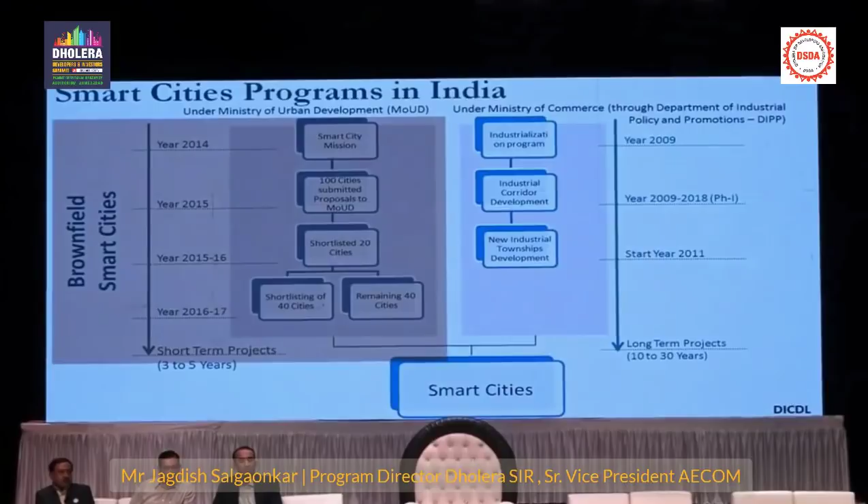So we call the one on the left a brownfield smart city program. Brownfield meaning that the cities are existing and you are trying to convert them into smart cities. So they install certain technology or Wi-Fi or traffic management to make it smart, like Surat is an example. Ahmedabad may be an example. However, on the right is the greenfield smart city. So greenfield means there is nothing there now. Greenfield means it's all grass, cover, everything is green.

From there we are building a city, and that program is called a greenfield city program, and Dholera is under the greenfield city program, under the Delhi-Mumbai Industrial Corridor, which is part of India's Industrial Corridor program. Now, I don't know how many of you know, but there are 5 different corridors that are planned in India. And the main purpose for creating these corridors is to increase the manufacturing GDP of India.

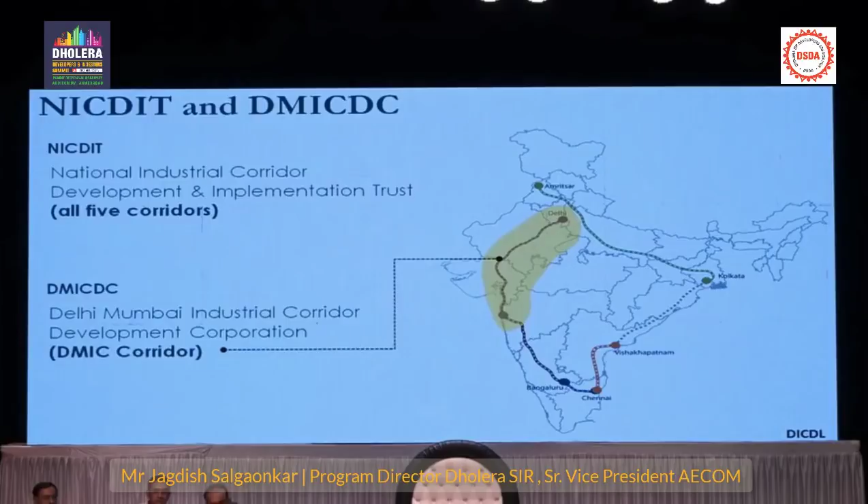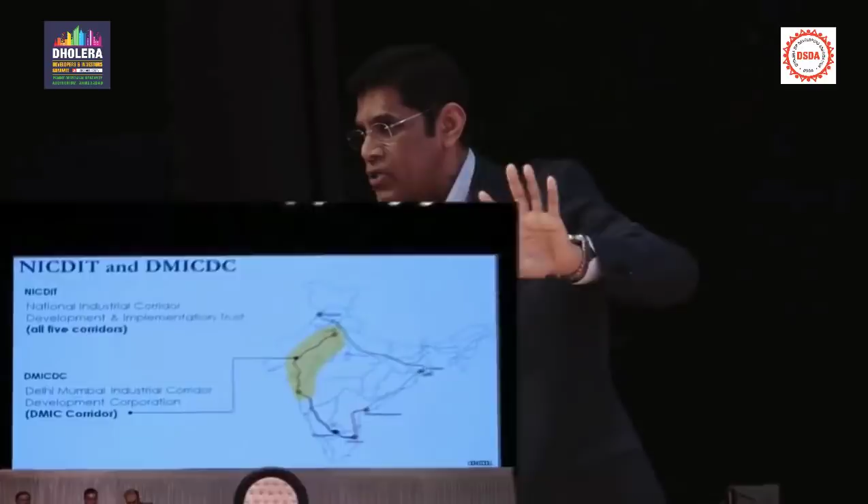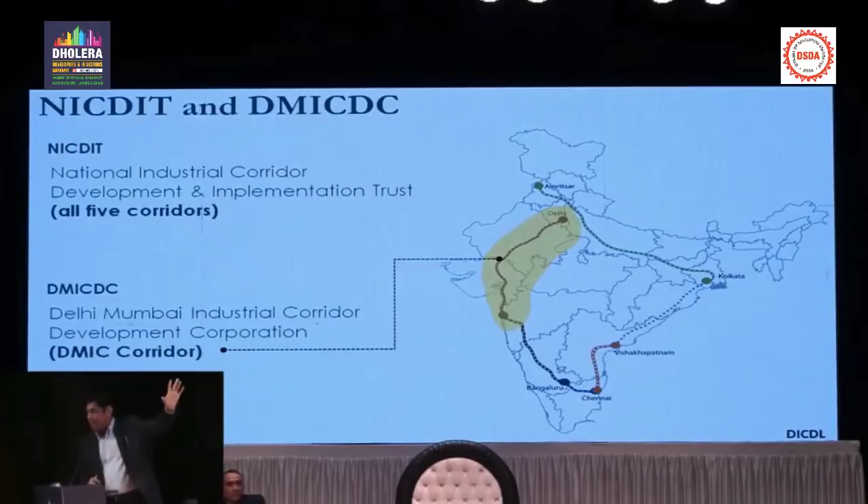So now you know the difference between where Dholera is as a greenfield smart city and where the other smart city programs are. They have no connection, the funding mechanism is different, and the management is completely different. But they are routinely mixed up. One is called the other, and people call me smart city Dholera, and they think I'm a part of the brownfield smart city.

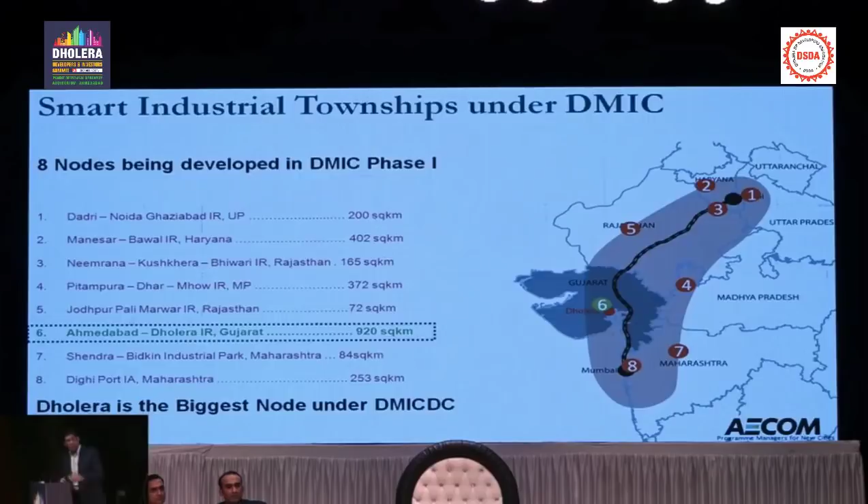So on this Delhi-Mumbai industrial corridor, there are 8 different nodes, as they call it, industrial areas that are planned. And you can see number 6 is Dholera. And this is the largest node on this Delhi-Mumbai industrial corridor. So Dholera is the largest. It is also the node that has come farthest along in terms of construction. So how big is Dholera?

Dholera is 920 square kilometers, but if you compare that to some countries like Singapore, it is even bigger than Singapore. So we are almost building a country like Singapore, because you can see Singapore is 71,900 hectares and Dholera is 91,000 hectares. So it's almost 20% bigger than the country of Singapore. So now you can imagine why it takes time, and I will explain that to you also.

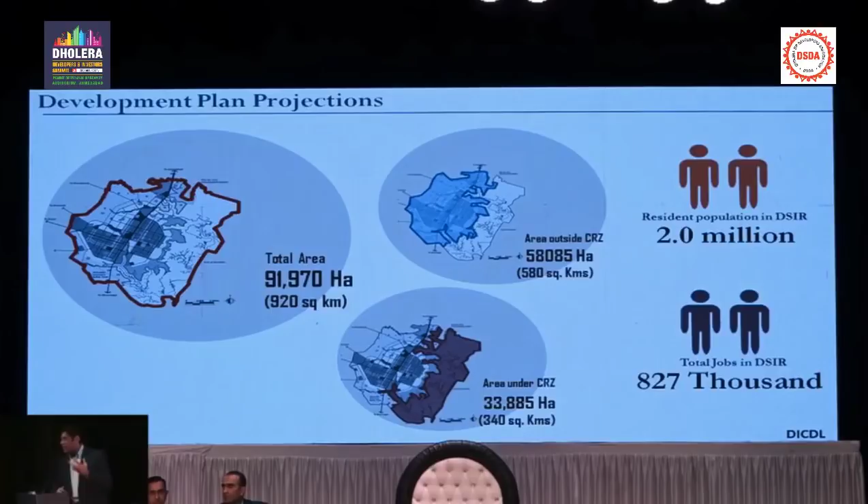These are all new industries under the Make in India program, which is what's going to create the economy for India.

So, one question: I've been working on this project since 2013, and a very common question that comes to me is, why does it take so long to build a city? So I wanted to show you the timeline as to why it takes so long. So in 2009, we enacted the SIR Act. But once the SIR Act is enacted, several things have to happen before you start building a city.

So you have to create a development plan, which takes some time. The development plan has to be then approved. To get a sanctioned development plan, it takes anywhere from 3 to 5 years. Because a development plan is a formal, official document of the government of Gujarat. It has a public review process, it has a public comment timeline, and it takes that long. You cannot rush. It is like saying, deliver me a baby in 3 months. The baby will take 9 months, give or take 15 days, 1 month maybe. So development plan will always take 3 to 5 years because it is a time-consuming process.

After the development plan, we have to do the design. After the design, then we have to do the construction. So you can see, by the time we go through the entire process, we are anywhere between 7 to 11 years.

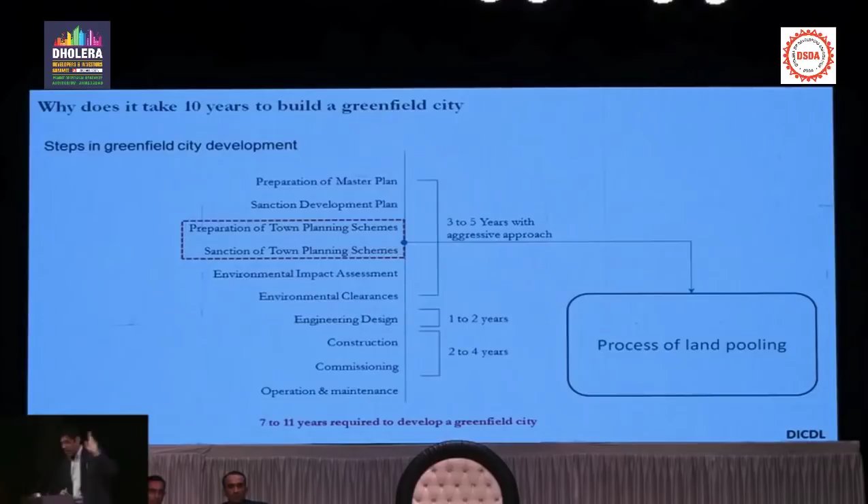So I want you all to know that the state of Gujarat, the Gujarat bureaucracy, and the engineers are all doing a fantastic job. So don't worry, this will happen. And I will show you how this will happen. So how do we start constructing a big country like Singapore or a big city like Dholera? You cannot do all 920 square kilometers.

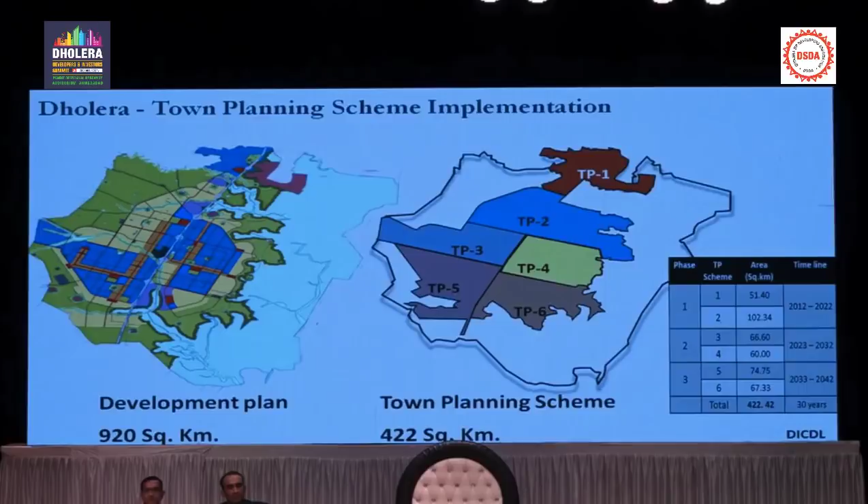So as you know, we have town planning schemes. So we broke the town planning schemes into 3 phases. Phase 1 is TP 1 and 2. Phase 2 is 3 and 4. And then TP 5 and 6 is phase 3. And you can see on the right-hand side, we have given you the approximate timelines. So phase 1 is up to 2022. We are doing the construction. Uske baad phase 2 or phase 3 chalu hoga, right? But within phase 1, if you look at phase 1, it is 153 square kilometers, which is TP1 and TP2.

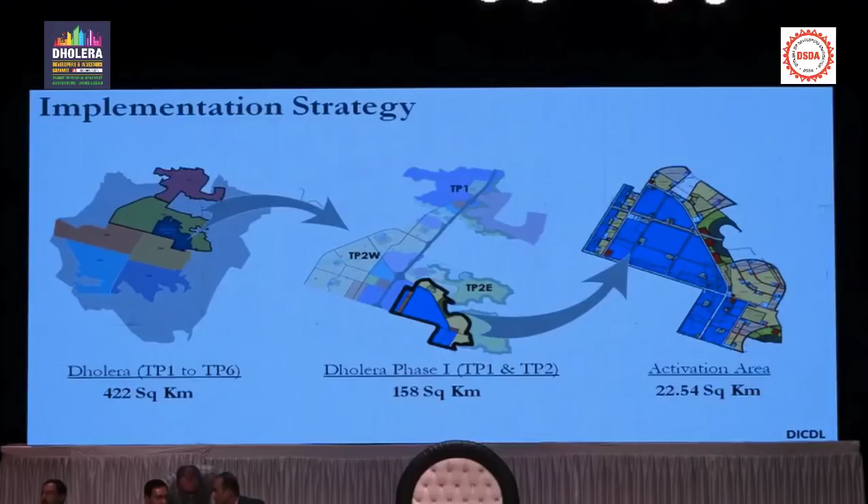So you can see new cities take time, and 22 is not a bad size. It is a big size, but because of industrial production, it is going to go very fast once companies start relocating. So in this 22 square kilometer, this is the breakdown. In 5 years, we will have 76,000 jobs in Dholera, in the activation area. Population will be about 1 lakh.

And this purple area that you see, that purple area is completely industrial. Okay? So majority of activation area is completely industrial.

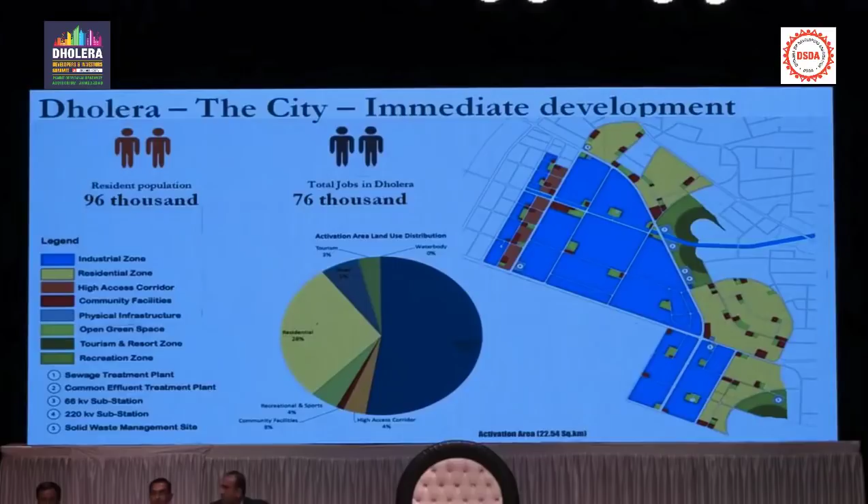And all the yellow is residential, the green is green cover, and all the red dots are public amenities, parks, playground, water, sewer, those kinds of things, power plant. So this is our footprint of 22 square kilometer. And this footprint, Dholera, is going to be managed by DICDL.

DICDL is a special purpose investment vehicle, SPV I should say, which is formed between DMICDC and the state government of Gujarat. And this is a special partnership, which is a 51-49% partnership, in which DMIC has put in 3,000 crore cash.

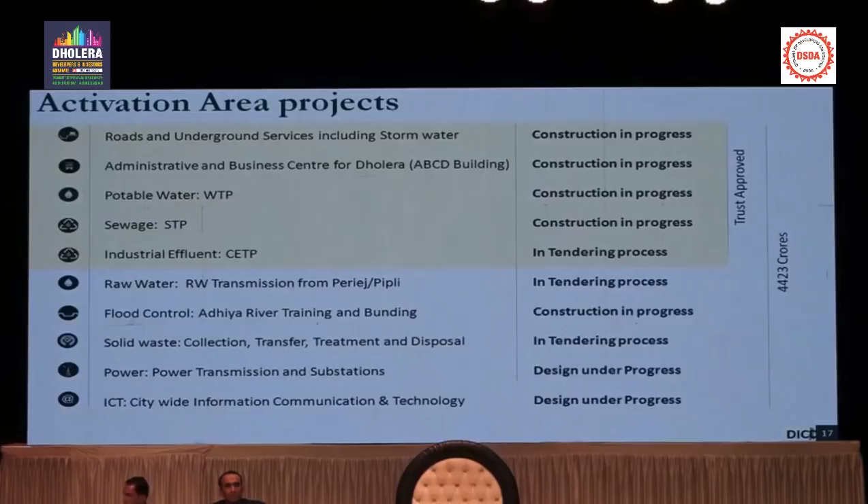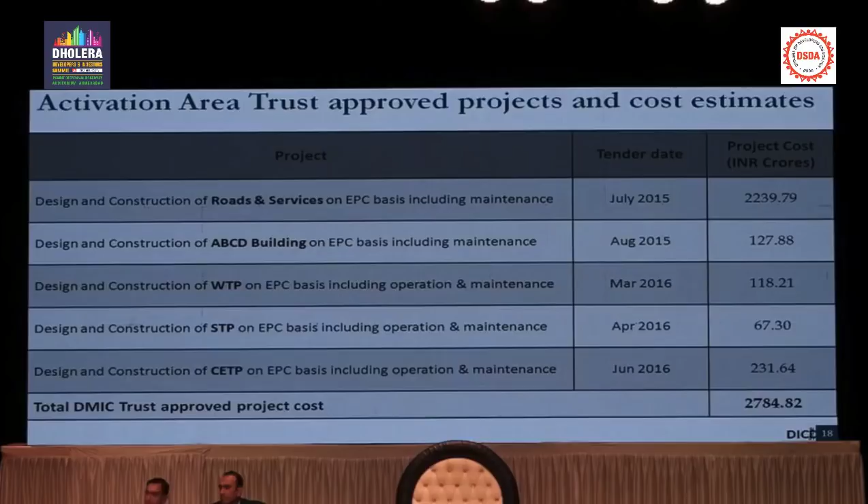We have 5 construction contracts already let out. L&T is the largest construction contract. You saw them on the film earlier today. Cube Construction, CCEL is doing the ABCD building. L&T is also doing the sewer and the CETP. And then SPML Construction from Delhi is doing the water treatment plant. So we have country's largest 5 contracts being let out at this amount.

Okay, so now I want to get a little bit into connectivity, because the second most frequently asked question to me is, hey, where is your Dholera located, 100 kilometers away, how will people go there, who will go to settle there?

So I want to remind everyone that there are many places in the world where you start a new city that's 50, 60, 80, 100 kilometers away, but very soon, over 10, 20 years, it sort of merges into the nearest main city.

In our case, we are hoping that Ahmedabad will be the nearest main city because it's a more vibrant, bigger community. We are also introducing this concept of a twin city, where Dholera and Ahmedabad will become almost like a twin city concept. Maybe not now, but maybe in a few years, because the corridor between Ahmedabad and Dholera is right now building a 6-lane access controlled expressway.

That expressway is actually under design by the National Highways Authority of India. It has already been funded. Land acquisition has started.

We are also building a metro inside the expressway that will reduce the commuting time between Ahmedabad and Dholera to less than 45 minutes. Now, when that happens, distance will no longer be an issue. It is going to become a twin city concept.

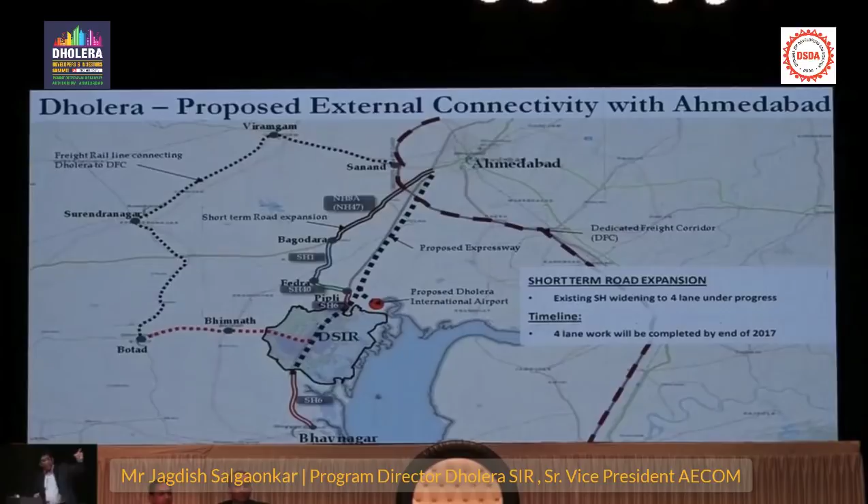I also wanted to point out the existing state highway, which I'm sure all of you who have driven there have noticed is being reinforced. The main reason for that is because the expressway will take about 4 years to build. We did not want to take any chance, so we are already strengthening the existing SH6, SH1, and SH40. They have already been strengthened, and lanes have been added with more capacity. I'm sure those of you who drive down there have noticed that.

Okay, so now let me switch gears a little bit and speak about smart cities. I'm sure the word smart cities has been so overly used that people are curious what a smart city actually means.

Can anyone give me a one-line definition of what smart city means to them? Does anyone have that? Okay, well, I'll give it a shot then.

This is sort of my own definition, compiled from many different sources, but it reflects our thinking of what we have come across. A smart city's infrastructure itself is an inanimate object, just a dead thing. But what makes it smart is that we install systems, processes, and devices into this infrastructure so that the people, the businesses, can make smart decisions.

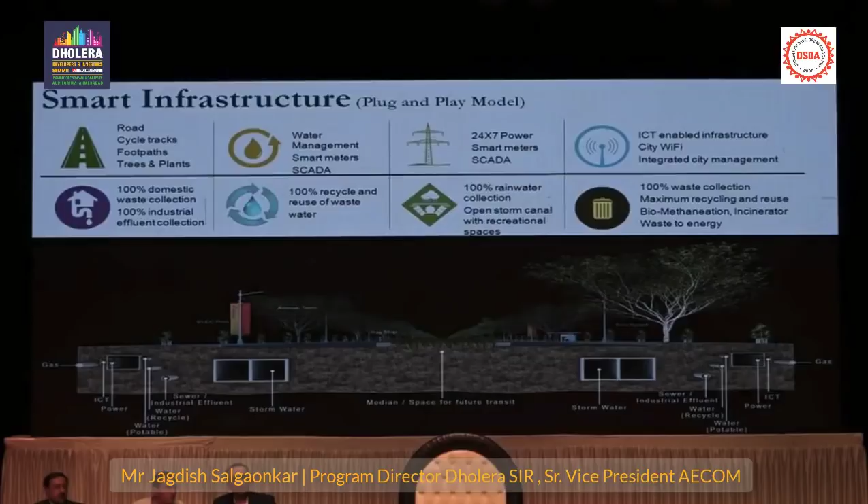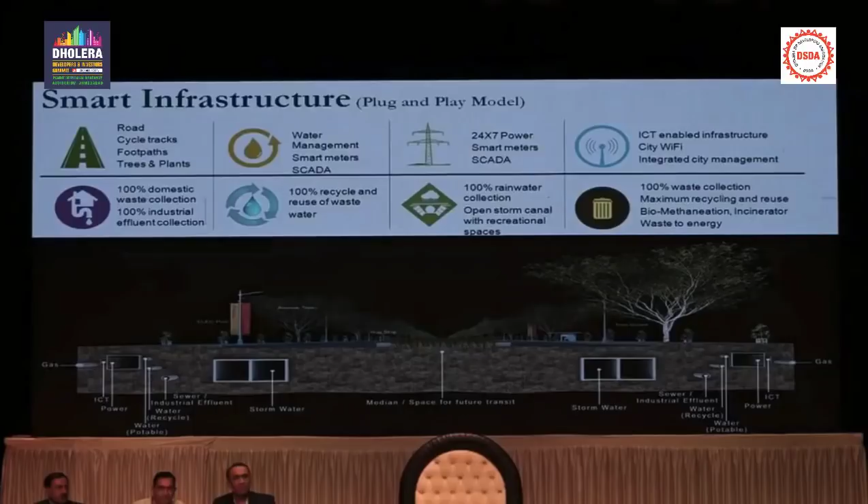Here's a snapshot of everything we are building. This is a typical cross-section of our road, and there are a few points I want to make. Number one, first time in India, we are building all of the trunk infrastructure underground - water, power, ICT, gas, wastewater recycle, everything is buried underground, even the power lines.

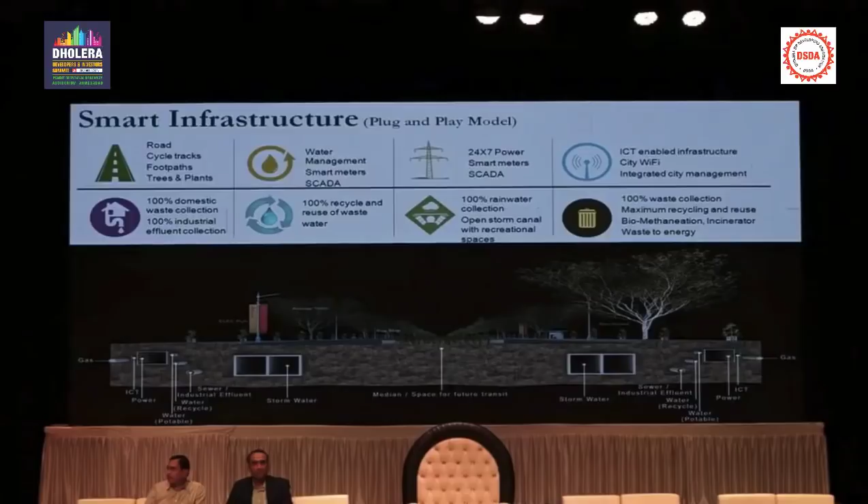So all this costs money. You don't get this kind of infrastructure in any industrial estate in India, in any city in India. That's why Dholera is world-class and the best.

In terms of different infrastructure, let me give you the highlights of each component. In roads and services, for example, we are building almost 300 kilometers of lane-kilometers of road - a total of 72 kilometers of road, but with multiple lanes, so we call it 300 kilometer-lanes of road.

It's a completely traffic-integrated sensor system. Each traffic light is going to have cameras, speed limits, sensors. All that information about devices being smart will be transmitted back to you, so you can make the decision which road to take. That kind of information is going to be proactive, not reactive.

So we have dedicated cycle tracks. You can see how the cross sections are designed, and this is the overall roadmap. And what you will see right now is...

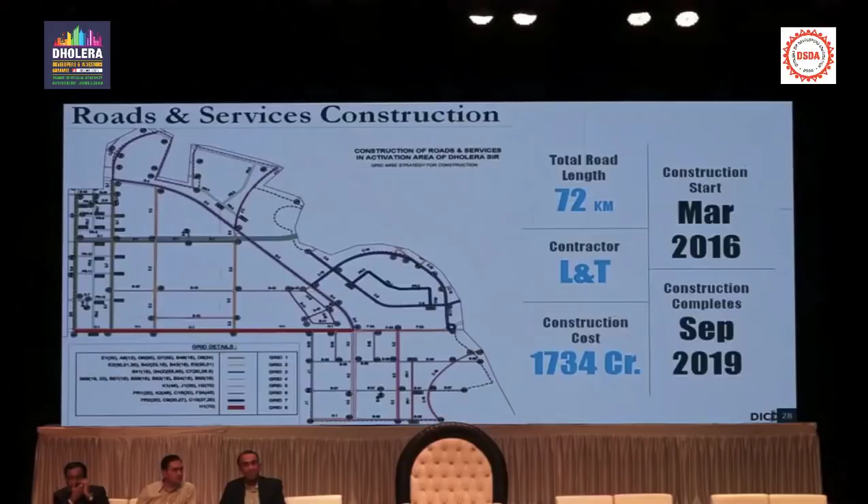It doesn't work on the screen, but G4, that line that comes from Dholera village, is the road G4 right now that's being built. I'm sure anybody who has gone to Dholera right now can start seeing the city beginning to take some shape and form.

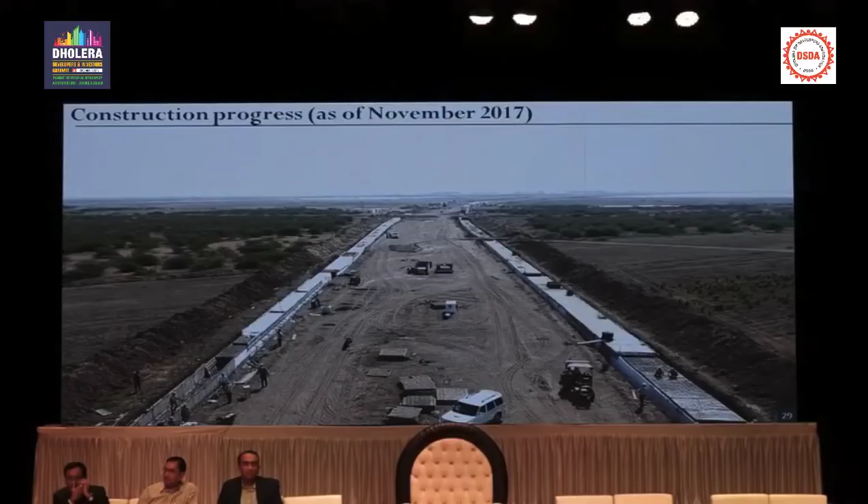Everything underground is built. Slowly it has to come up, and most of you know Dholera is a very difficult area for construction because the soil conditions retain a lot of moisture. So you have to dry out the moisture, compact it correctly, so the roads will last for 30 or 50 years. That's what we are doing right now, building these roads.

Power is going to be available in March 2019. Right now we have invited private companies - both Torrent and Adani are applying for the license with GERC, and GETCO is building the transmission line. Both of those components will be ready by March 2019, the latest, or even sooner.

Then in water, which is by far our smartest component because of the technology, we have quality meters, so you get the ultimate best quality of water.

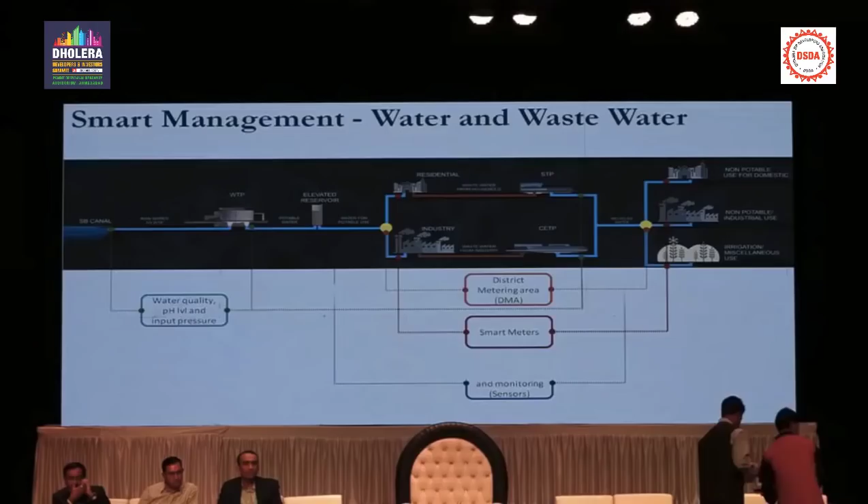We have district metering on water, and then we have smart meters as well as leak detection systems. This is another component which, to you as consumers, is going to save a lot of money.

Leak detection is a major problem in all the cities in India. For example, in Mumbai, about 34% of the water that's produced, which is paid for, gets lost or stolen. In Ahmedabad, about 17 to 23%. And who pays for the lost water? The existing customers pay, because it gets loaded onto your cost.

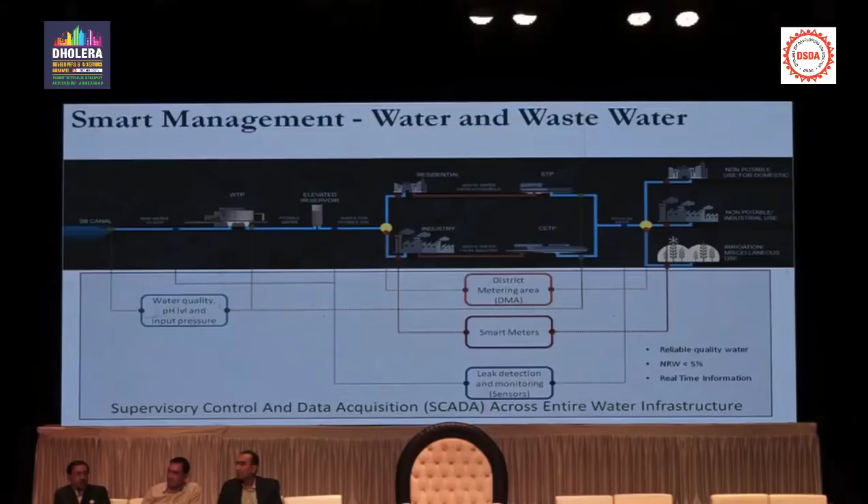In Dholera, we will not waste more than 5% of water, and that is only because of evaporation, transpiration, and whatever is required to wash down the machinery. The rest of the water goes back into the system. That means higher efficiency, lower cost. We are installing all these smart features not just to increase the cost, but because eventually the consumer is going to pay less in the long run. All we look at is life cycle cost savings.

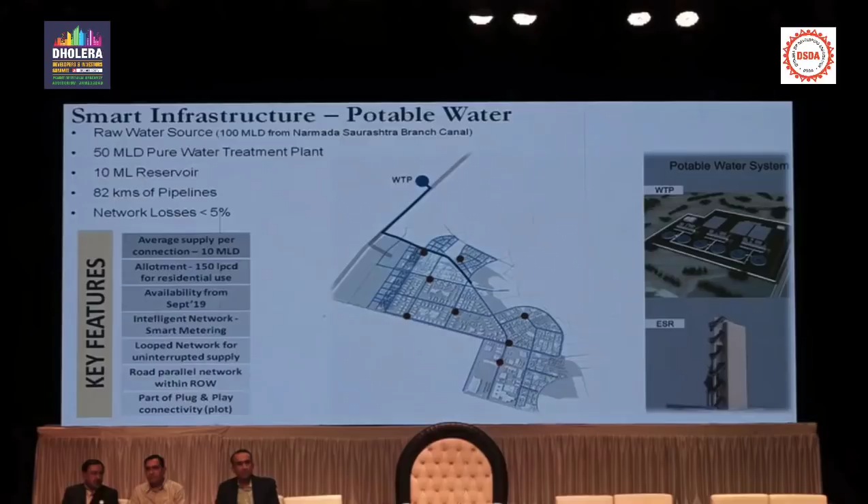In terms of potable water, we are bringing in 10 MLD of water immediately, and it will be ready by March 2019, or maybe June 2019. And again, everything is smart metering, I think it's the same system.

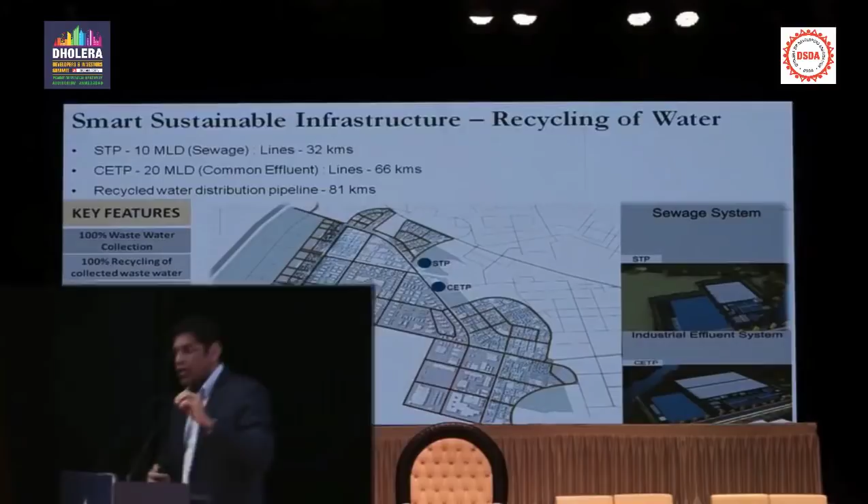Recycled water is another unique aspect of Dholera, we have 100% recycling of wastewater. I think this is probably the first city in India doing 100% recycling, and all of this wastewater is going to be used for industrial water use.

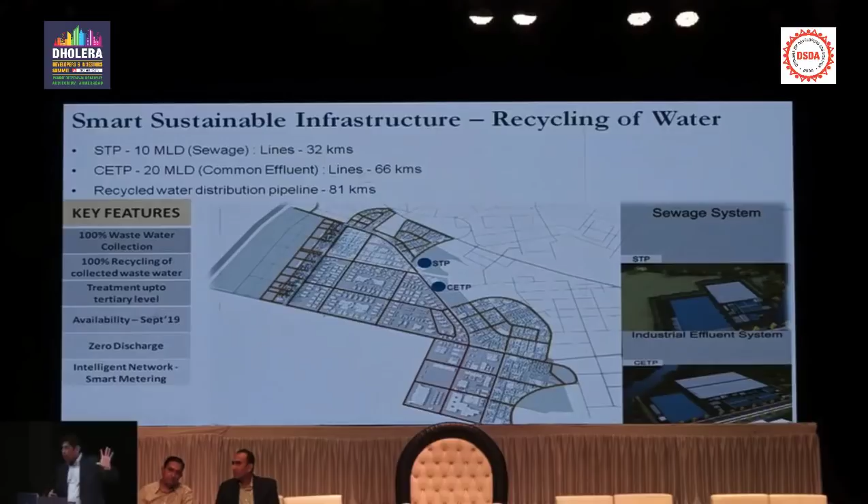So we are maximizing sustainability, we are promoting water savings. Gujarat is a water scarce area. For all of these different things, I'll show you the kind of accolades and awards that we have won later on. But this has been recognized all over the world as the best place in terms of technology and utilities.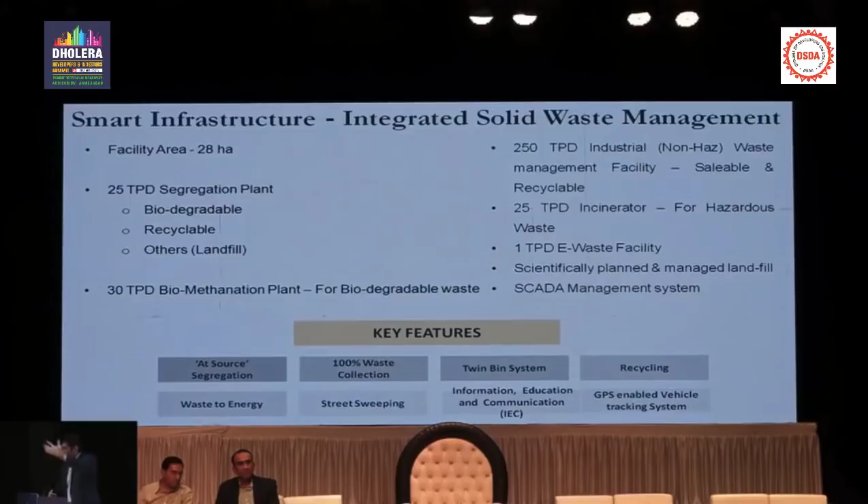In terms of solid waste, it's door-to-door collection. Everything will be collected in separate bins, with 100% recycling, composting, biomethanation, and gas production. So all of those things are planned. Although solid waste will take some time, because as people come in, you generate garbage, you don't need it on day one. So maybe 2 or 3 years down the road, we will do that.

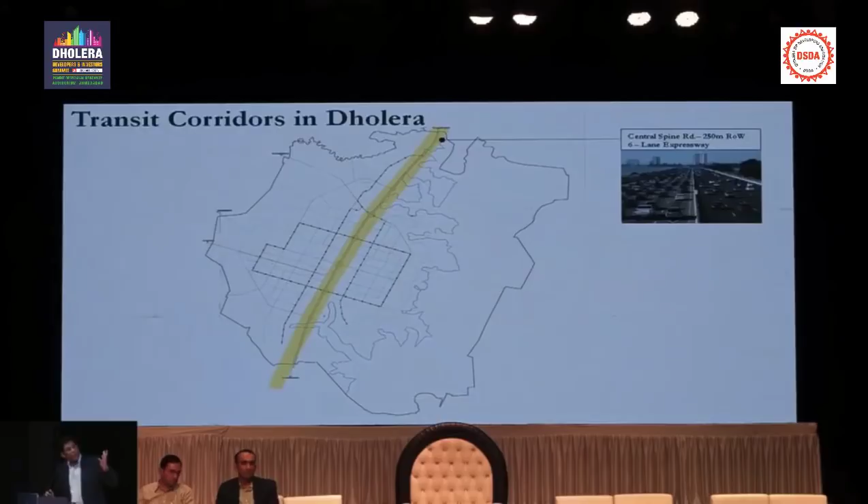So that leaves us with the infrastructure components. Now let me get into the urban transit and the livability aspects of Dholera. So far we have talked about businesses, infrastructure, and utilities. So what this shows you is what we are planning from a transit standpoint for Dholera.

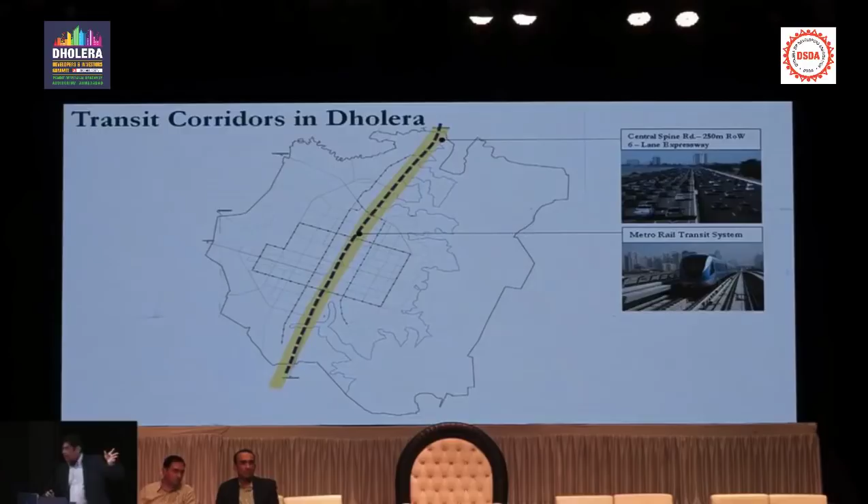Like I mentioned earlier, there is a metro within the expressway. The yellow line is the expressway, and there is a metro that's going to run from Ahmedabad to Dholera. It's currently on the JICA funding plan for 2019. Then there is a light rail system planned, shown by the green and blue lines.

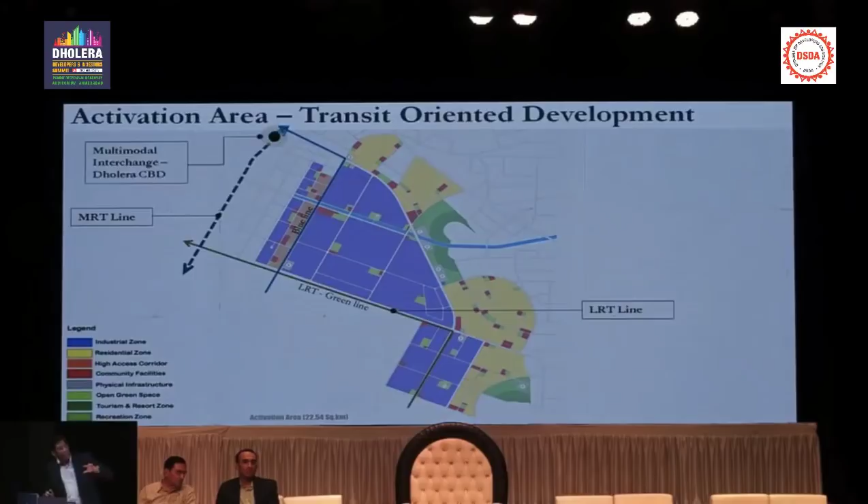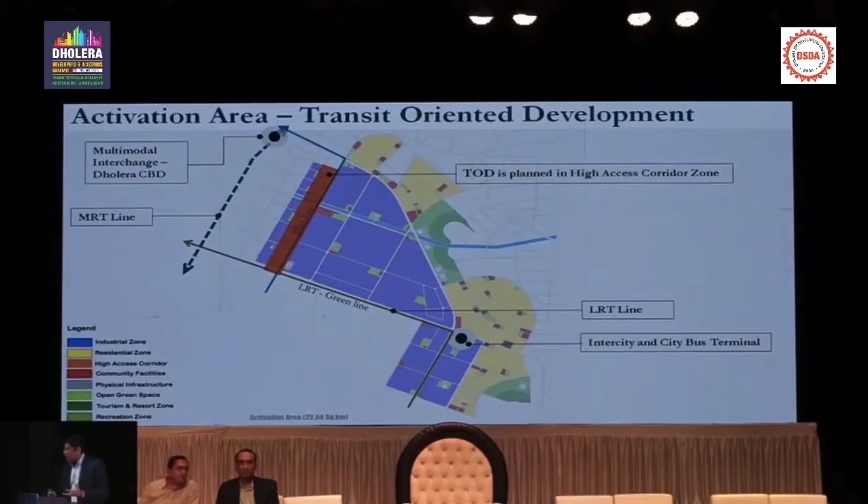I also wanted to show you the transit-oriented development we are planning, where the metro comes on this line, you've got the green and blue light rails, and then the bus terminal. This orange patch is our high access corridor, which is mixed use development, high FSI, like what they would call the downtown. It will have a transit-oriented development with all kinds of businesses, commercial, and residential development going on in one place.

Most of you may be wondering, but this is a good time to share a little story with you. All of you know Dholera is very flat land. People routinely confuse flooding and flooded area with inundation. That is a technical difference between the two terms.

Inundation means when water has nowhere to go because it is so flat that it has the inability to drain.

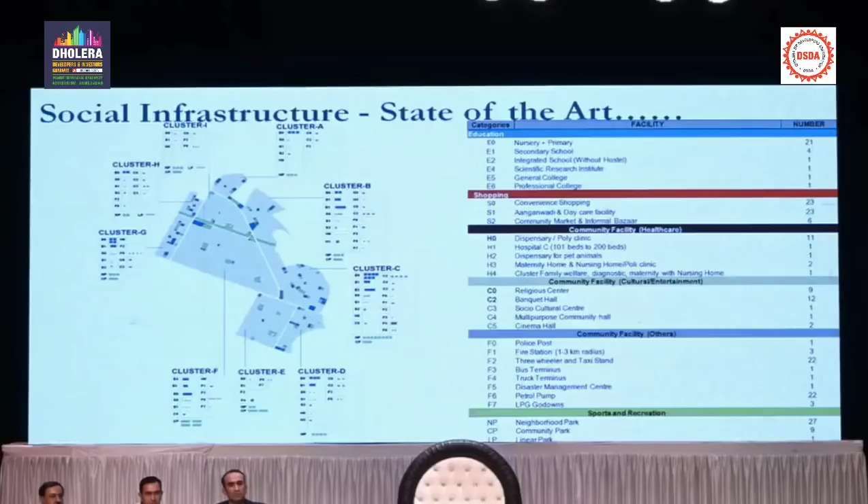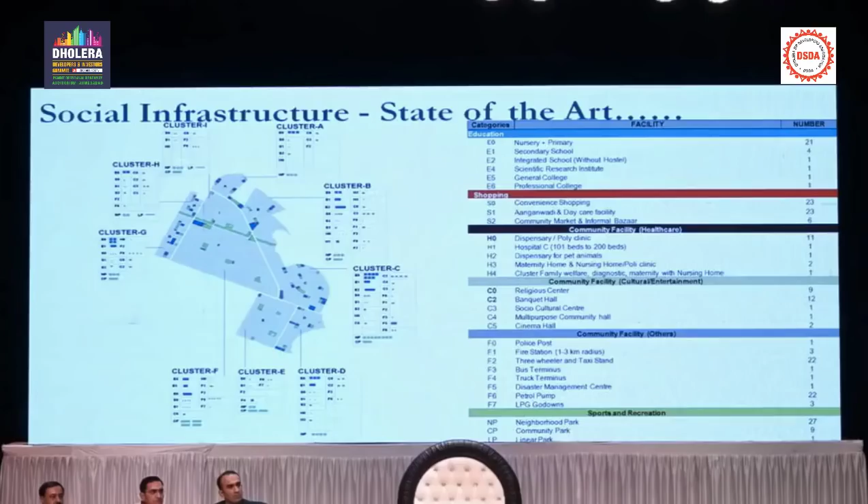And this is how we have spread out all of the social infrastructure. This is already pre-planned, so you will not find some school coming up anywhere or the zoning being changed. Nobody can change the zoning in Dholera. It's pre-planned, it's fixed, so you know exactly where all of these facilities on the right-hand side are located on the map. I know it's hard to read, but they are all properly shown on the map. So if you are planning something in Dholera, you can know exactly where all the social facilities will be coming up.

I talked about the canal earlier, and we see great opportunities in the canal. Particularly for me, coming here to Dholera and designing a brand new city. I always notice when I'm in India that it is the sense of civic sense, just aap bolte ho, civic sense, pride for our community, art and architecture. I don't know, for some reason, aajkal ki generation doesn't give it a lot of value.

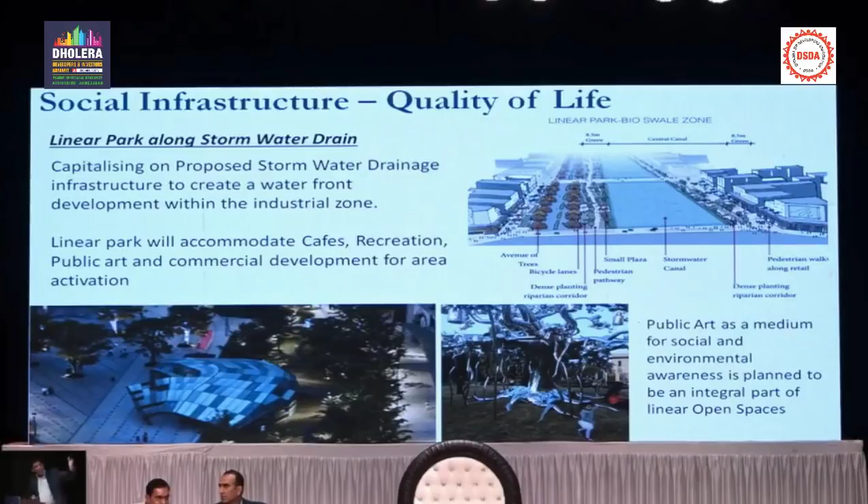So we are trying to bring that back through this whole canal feature, where we may have art and artistic expressions. We may create zones that will allow people to showcase their art culture. We may create zones where we can demonstrate some of the national initiatives like Swachh Bharat.

So we are trying to create an environment where family is just as happy as businesses, where we have a lot of open spaces, a lot of parks with good kindergarten schools, good school education, good public hospitals, public facilities. So all of these things are pre-planned. Now all that we need to do is get this tremendous audience interested and start building, right?

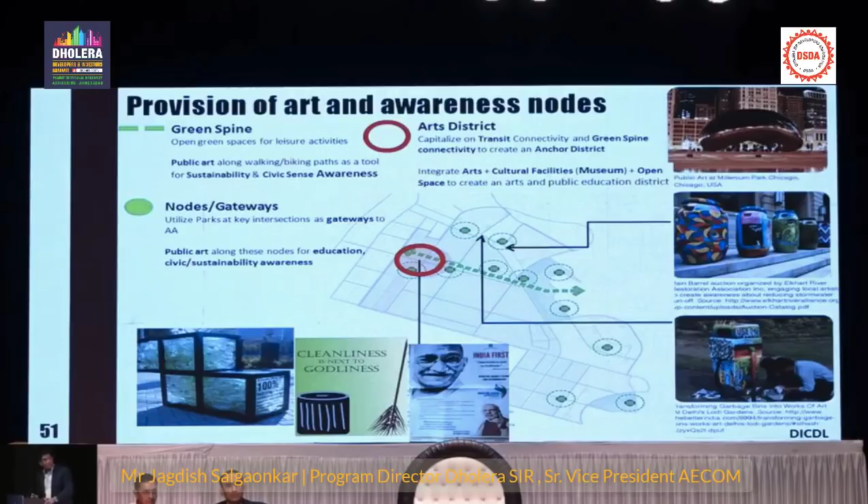Okay, so in terms of municipal operations, I mentioned earlier that we are providing a lot of smart devices and systems into Dholera. All of this is going to come into a central command control center. And this command control center, the picture on the top left that you see, is more like if you have seen the movie Star Wars. You know how they show all those big screens. So the entire city is going to be mapped and planned from there.

So every single traffic light, every single water meter, every single usage, everything comes into this command control center. Ahmedabad uses a miniature version of this now. They have a police command control center. Surat also has one. But for a citywide, nobody has one yet. So Dholera will be the first one.

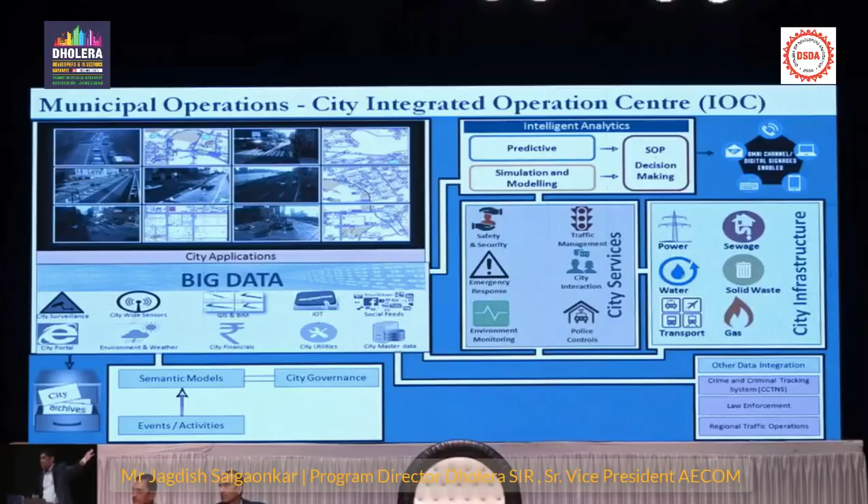And what I mentioned earlier, this whole cycle of gathering data, bringing the data into the control room, writing the computer algorithms and the analytics to give you the knowledge to make smart decisions is going to happen here. This is the brain of the city, which is going to reside in the SPV building. You saw the building earlier that's being built.

Smart governance, which is again a paperless form of government. Nobody, in today's day and age, should be required to walk to City Hall or city offices to get a driver's license or pay your fees or bills. All of that will be online. You should be able to do it on mobile. You should be able to do it on your laptop. Everything will be online, and this is going to be built in.

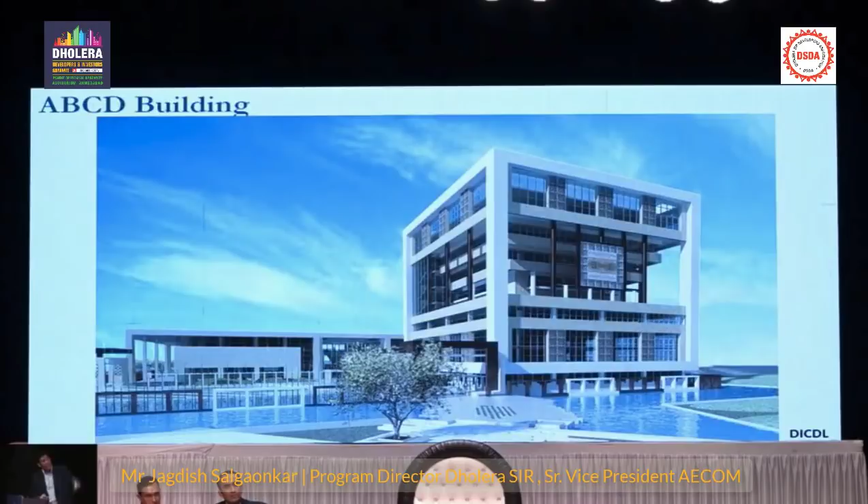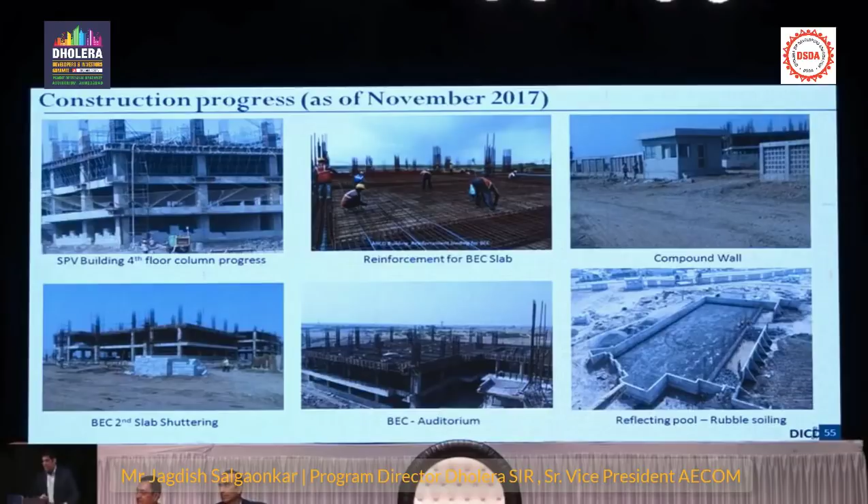This is already being done in many places throughout India, because this is the easiest place to convert a brownfield city into a smart city. So a lot of the brownfield cities are already doing this. But for us, it's a way of life in Dholera. It's going to be part of our... And this is the ABCD building. I mentioned this is the construction that's already going on. You can see some of the pictures there. I think the video that was shown earlier on was a fantastic video that showed you some insights on the construction that was going on.

So probably of most interest to all of you is, what are we selling, when are we selling, and for how much are we selling? So you can all do your businesses, and I see a lot of crorepatis in here in the next few years. This is all of the zoning that I mentioned earlier. Blue is industrial. The same thing you can see on the right-hand side is all of the plot sizes. So we have 0 to 5 hectares, 25 plots, 5 to 10 hectares, 17 plots.

Now those plots, these are plots owned by the government. There are many, many private players in the activation area. We have not listed their plot sizes yet. This is only what government is selling right now. This is what we are targeting our audience, which is the industrial clients that we are selling to.

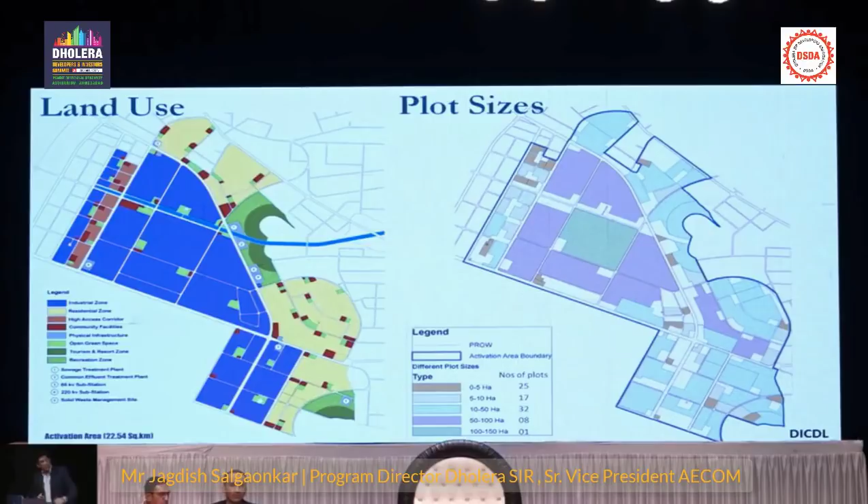We have also advertised heavily for selling our land. We have made a commitment that of the initial 5,600 hectares, we will give them allotment in 17 days and possession in 90 days. This is by far the fastest that we have made a commitment to. This is our commitment to efficiency and transparency, and our complete land allotment system is online. Anyone here can go online right now. That's the address right there. You can go online, you can select the plot, you can click on the plot.

It will give you the information on the plot, what the dimensions are, what the setback is, and you can make an application online. That application online goes to our general manager, Dilip Brahmbhatt, who's sitting right here. He then processes it and puts it up to the MD for approval. There is a land allocation committee that votes based on the businesses.

If the industry falls into one of many categories that we really want to have, which is the mega investment category, and there are several formulas for that, we offer several incentives and discounts. So a lot of industries are right now talking to us, and they are all looking at it. So as soon as we get a little bit above ground, I think in the next 3 to 6 months, we should have some sort of an idea of who our anchor tenants are going to be.

These are the industries that we are targeting. Defense, general manufacturing, heavy engineering are our top 3 priorities, for the simple reason that all these 3 industries require the largest amount of land for their businesses. And Dholera has the highest amount of land of any new city in India. We have also done a benchmarking throughout Southeast Asia, and we find that there is no other new city or industrial estate that can offer land parcels as big as Dholera.